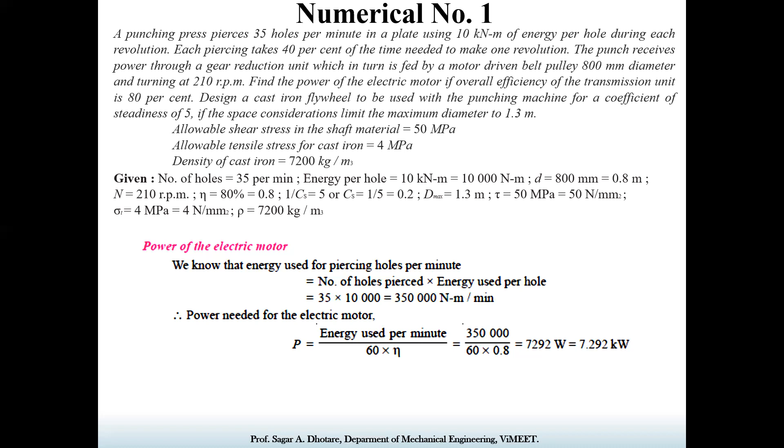So how much power is required? That is 7.292 kilowatt. Now you can select the motor from PSG data book page number 8.125. Now the next one, the design of the cast iron flywheel.

First of all, let us consider the maximum fluctuation of energy. As the overall efficiency of the transmission is 80%, the total energy to be supplied during each revolution is the energy transmitted each revolution, 10 kilonewton meter, divided by 0.8. So the actual energy required is 12.5 kilonewton meter. That much energy is needed.

We should calculate the velocity of the belt to calculate the tension in the pulley. V is equal to pi DN, where the diameter of the pulley is 800 mm and the speed is 210 rpm. So the velocity is 528 meter per minute. The net tension or pull acting on the belt is equal to P into 60 divided by V. The power is 7.29 kilowatt, so it is 7,292 into 60 divided by the velocity, 528. So the net tension is 828.6 Newton.

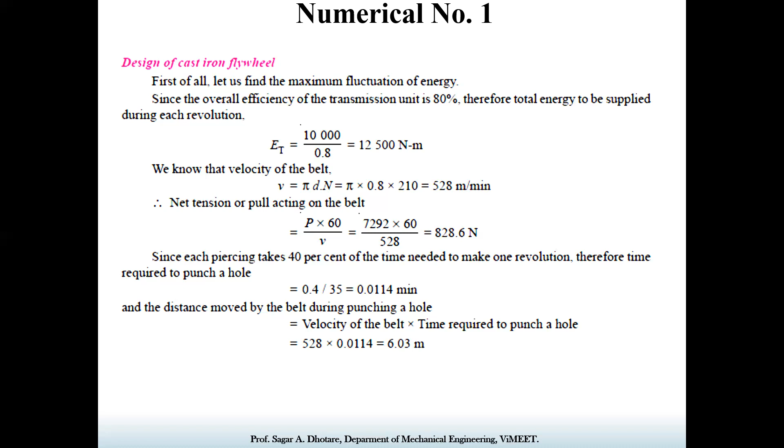As we know, each piercing takes 40% of the time to make one revolution. Therefore, the time required for punching a hole is 0.4 divided by 35, that is 0.0114 minute to punch one hole. The distance moved by the belt during punching a hole is the velocity of the belt into the time, that is 528 multiplied by 0.0114, which is 6.03 meter. This is the distance moved by the belt during the punching of each hole.

Now the energy supplied by the belt during the punching of a hole is EB, net tension into the distance traveled by the belt, that is net tension, which we have calculated, 828.6 multiplied by 6.03. The energy supplied by the belt during the punching of a hole is 4,996 Newton meter.

Thus, the energy to be supplied by the flywheel for punching during each revolution, or you can say maximum fluctuation of energy, is nothing but ET minus EB, that is the energy actually transmitted and the energy actually utilized. So that fluctuation is calculated by ET minus EB, that is 12,500 minus 4,996. The fluctuation of energy we get is 7,504 Newton meter.

Now we need to calculate the mass of the flywheel. Small m is the mass of the flywheel rim. Considering the maximum flywheel diameter is 1.3 meter, from the empirical relation, capital D is equal to 1.2 m, or you can say R is equal to 0.6 m. Now we know the angular velocity omega is equal to 2 pi N by 60, with N equal to 210. So omega is equal to 22 radian per second.

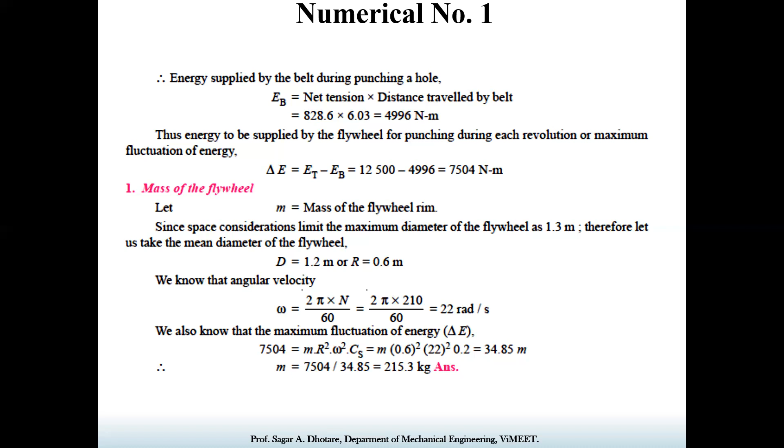Now we know the equation of the mass of the flywheel ring: m is equal to A into pi D into rho. So 215.3 is equal to A into pi D into rho. A is equal to 2T square, D is equal to 1.2 meter, which is the maximum we have considered, and density is given as 7,200. So putting all the values, we get T is equal to 0.065 meter, that is 65 mm. And B is equal to 65 multiplied by 2, that is 130 mm.

Next, calculating the diameter and the length of the hub. Small d is the diameter of the hub, d1 is the diameter of the shaft, and L is the length. The diameter of the shaft we can calculate based on the mean torque transmitted by the shaft, P into 60 divided by 2 pi N. That torque is equal to 331.5 Newton meter.

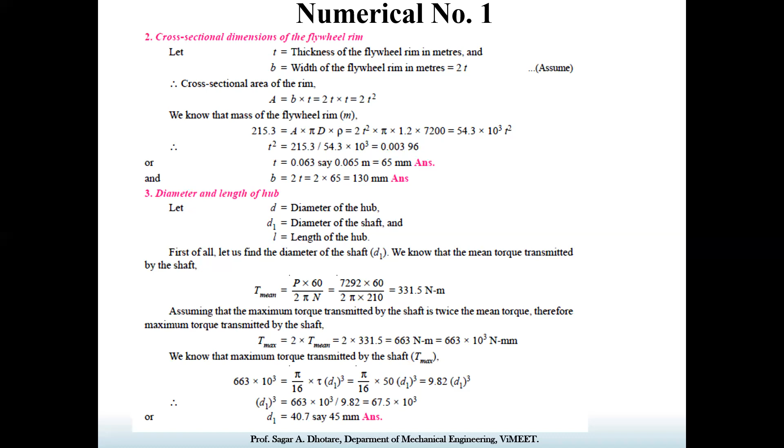Now based on the empirical relation, the hub diameter is 2 times the diameter of the shaft, that is 45 multiplied by 2, 90 mm, and the length L is equal to B, that is 130 mm.

Now cross-section dimensions of the elliptical arms. The material is cast iron, that is elliptical cast iron arms. A1 is the major axis, B1 is the minor axis. B1 is equal to 0.5 times A1, that is the assumption. And we are considering the number of arms equal to 6.

So the maximum bending moment in the arm at the hub end, considering the arm as a cantilever beam, is M equal to T divided by R into n into capital R minus small r.

That is radius of flywheel minus radius of hub. So putting all the values, what we get: 663 divided by 1.2 into 6 into bracket 1.2 minus 0.09. The maximum bending moment M is equal to 102.2 Newton meter. Now the section modulus for the arm, as it is elliptical, so Z is equal to pi

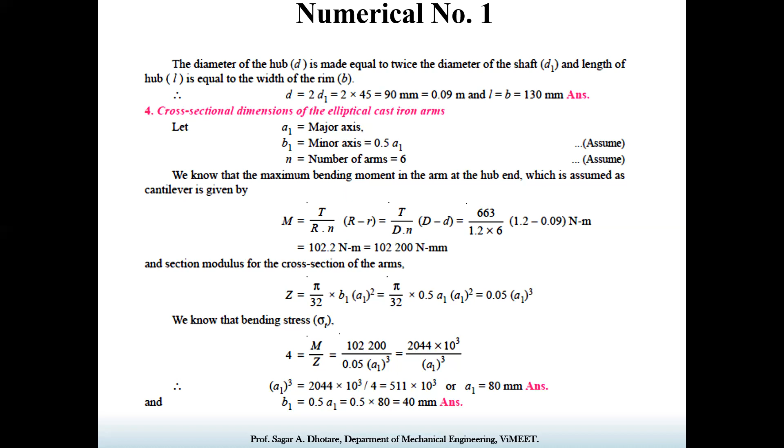So putting the values of M and Z, we get all values in the form of A1. So the major axis for this elliptical arm is equal to 80 mm, and the minor axis of this elliptical arm is half of that, so it's 40 mm.

Now calculation of the dimensions of the keys. Based on the diameter, we select a standard key from PSG, a rectangular sunk key with width W equal to 16 mm and thickness equal to 10 mm. So let's see whether this key will fail or it can sustain the torque. The key will be designed by considering the failure of the key in shearing.

So for shearing, we need the maximum torque of the shaft, that is 663 into 10 raised to 3 Newton mm, which is equal to L W tau into D1 by 2. So putting all the values, we get length L equal to 38 mm. Because we know the width and the thickness of the key, we only need to calculate the length.

Now let us check the total stress in the rim, which should not be greater than 4 megapascal. We know that the velocity of the rim V is equal to pi D N by 60, that is 13.2 meter per second. And the total stress in the rim is sigma equal to sigma V plus sigma T, which we have already simplified: sigma is equal to rho V square into 0.75 plus 4.935 R divided by n square into t, where n is the number of arms.

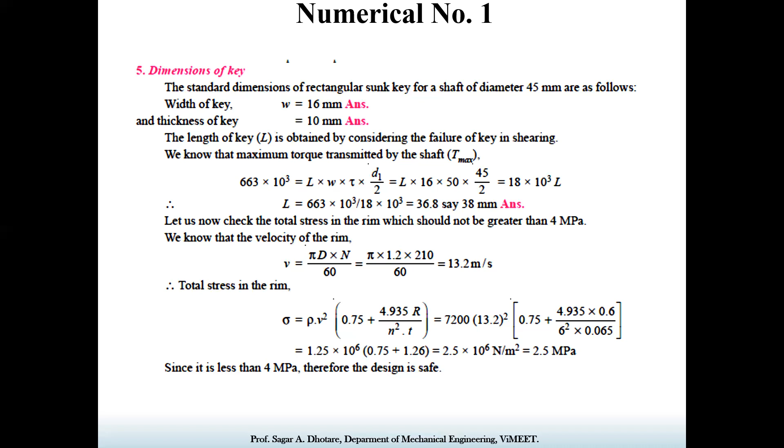Now we will discuss one more example with respect to the four-stroke engine. Design and draw a cast iron flywheel used for a four-stroke IC engine developing 180 kilowatt at 240 rpm. The hoop or centrifugal stress developed in the flywheel is 5.2 megapascal. The total fluctuation of speed is to be limited to 3% of the mean speed. The work done during the power stroke is 1/3 more than the average work done during the whole cycle.

The maximum torque on the shaft is twice the mean torque, and the density of cast iron is 7,220 kg per meter cube. So here a lot of data is given, so you have to read each data carefully. Initially you can draw the turning moment diagram. In figure number 14, I have drawn the turning moment diagram. Also, we have written the given data.

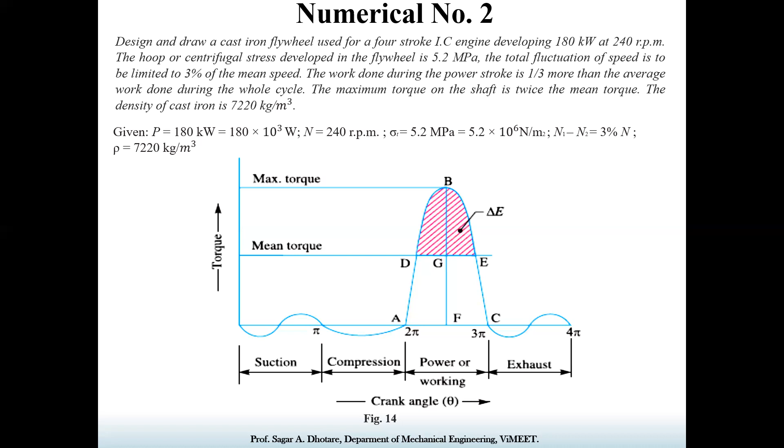Power given is 180 kilowatt. Speed is 240 rpm. Sigma T, that is stress, is 5.2 megapascal. N1 minus N2 is given as 3% of N, and rho is equal to 7,220 kg per meter cube. Now, first of all, let us find the maximum fluctuation of energy based on the turning moment diagram.

We know that the mean torque transmitted by the flywheel, Tm, is equal to P into 60 by 2 pi N, where P is 180 into 10 raised to 3. So the torque calculated is 7,161 Newton meter. And the work done per cycle is nothing but Tm into the angle in radians, theta. To complete one cycle, we have to rotate two revolutions, so that is 4 pi.

Theta is equal to 4 pi. If we are considering a two-stroke engine, then the value of theta is 2 pi. Okay, so putting all the equations together, what we get is the work done per cycle is equal to 90 into 10 raised to 3 Newton meter.

So since the work done during the power stroke is 1/3 more than the average work done during the whole cycle, therefore the work done during the power stroke is equal to work done per cycle plus 1/3 of the average work done during the whole cycle, that is 90 into 10 raised to 3 plus 1/3 of 90 into 10 raised to 3. The work done during the power stroke is 120 into 10 raised to 3 Newton meter.

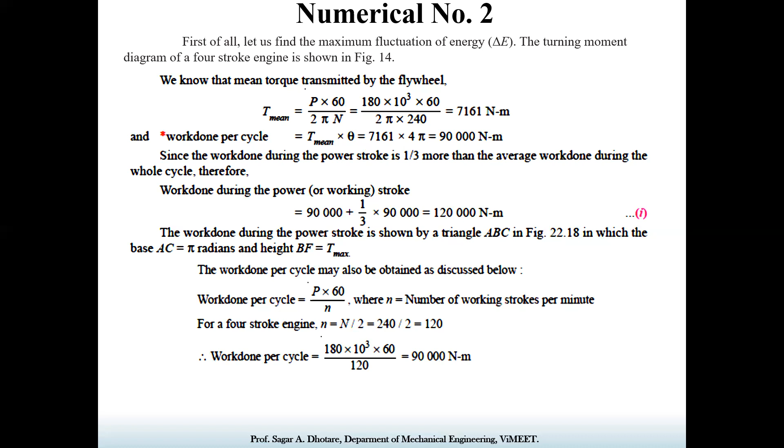Okay, so the work done per cycle is P into 60 divided by n, where n is the number of working strokes per minute, that is capital N divided by 2, that is 240 divided by 2 is 120. So work done per cycle is 90 into 10 raised to 3 Newton meter. So work done during the power stroke is 1/2 pi into T max.

Now compare equations 1 and 2. Based on those two equations, we can calculate the maximum torque. That is 120 into 10 raised to 3 multiplied by 2 divided by pi. So maximum torque is 76.384 into 10 raised to 3 Newton meter.

Now the height above the mean torque, that is BG, is equal to BF minus FG, that is T max minus T mean. We need to calculate the difference because that much is excess power. Okay, so the difference is 69.223 into 10 raised to 3 Newton meter.

So now we need to calculate the maximum fluctuation of energy. Okay, so how can we calculate it? By using the geometrical relation, area of triangle BDE divided by area of triangle ABC is BG square divided by BF square. Okay, so putting the values, the area of triangle ABC is 120 into 10 raised to 3. BG is equal to 69.223 into 10 raised to 3. BF is equal to 76.384 into 10 raised to 3.

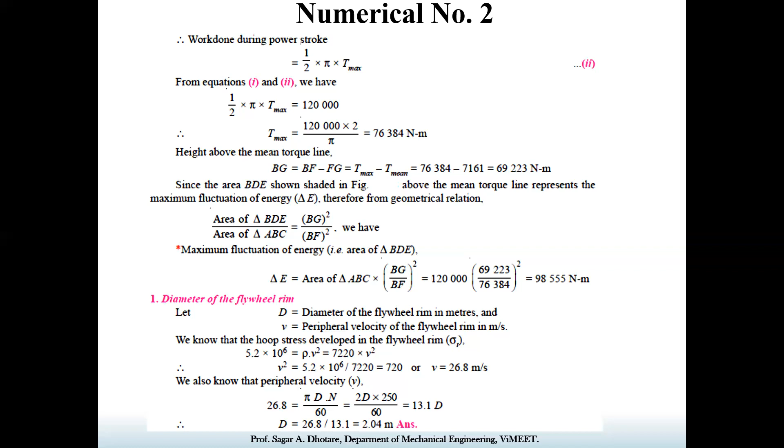Now we know the peripheral velocity, and we also have the speed, so we can easily calculate the diameter. V is equal to pi d n by 60. Putting all the values, we get d is equal to 2.04 meter.

Now calculating the mass of the flywheel rim. We can calculate it by using the equation of maximum fluctuation of energy. So first of all, we need to find the angular speed, then the coefficient of fluctuation, and then we can easily calculate, because we know that the maximum fluctuation is 98.555 into 10 raised to 3 Newton meter. Okay, so the angular speed of the flywheel rim omega is equal to 2 pi n by 60, that is 25.14 radian per second.

Now the coefficient of fluctuation, n1 minus n2 divided by n, is equal to 0.03. Okay, now putting all the values, delta E is equal to m r square omega square Cs. Here, except for the mass, the other values are known, so putting all the values in the equation, we get m is equal to 4995 kg. Okay, so that is the mass.

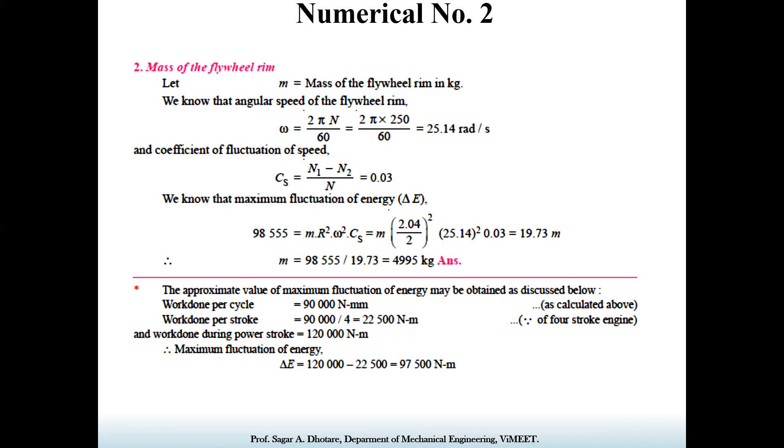Now next one, cross section dimensions of the rim. As we know, b is equal to 2 times t, where t is the depth or thickness of the rim, and b is the width of the rim. Now cross section area: this process is completely similar to numerical number 1. So A is equal to b into t, b is equal to 2t, so A is equal to 2t square. Now the mass of the flywheel m is equal to area into pi D into rho.

So putting all the values of known things, we get thickness equal to 235 mm and b equal to 470 mm. Now next one, to calculate the diameter of hub and shaft. The diameter of the shaft we can calculate based on the maximum torque. Maximum torque is 2 times the mean torque. Mean torque is 7,161 Newton meter multiplied by 2, so 14.322 into 10 raised to 3 Newton meter, that much is the torque.

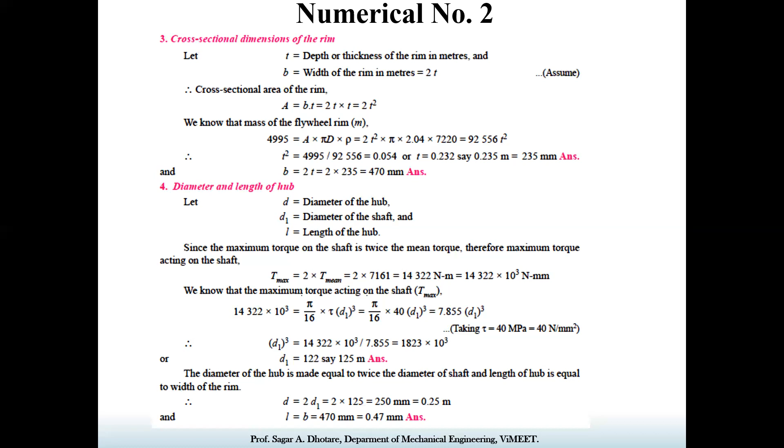So the maximum torque acting on the shaft, T max, is equal to pi by 16 into tau into d1 cube. Putting all the values and calculating the diameter, d1 is equal to 122. But the standard nearest diameter of the shaft is 125, so we are considering d1 equal to 125. Now the diameter of the hub is twice d1, that is 250, and length is equal to b, that is 470 mm.

Now the cross section dimensions for arms: that cross section is elliptical. The major axis and minor axis relations we already know. The number of arms we consider is 6. The bending stress of the material is 15 megapascal, which is given. Now the maximum bending moment in the arm is at the hub end, which is assumed as a cantilever beam. So capital M is equal to T divided by R n into bracket R, the radius of the flywheel, minus radius of the hub. Putting all the values, the maximum bending moment M is equal to 2094.5 Newton meter.

Now section modulus: Z is equal to pi by 32 into B1 into A1 square. That is the equation for elliptical cross section. Putting the empirical relation between B and A, the section modulus equation resolves as 0.05 A1 cube. Now the maximum allowable bending stress is 15, so sigma b is equal to M by Z, M is 2094.5 into 10 raised to 3, divided by Z equal to 0.05 A1 cube. Based on this relation, we find A1 is 140 mm, and B1 is equal to 70 mm.

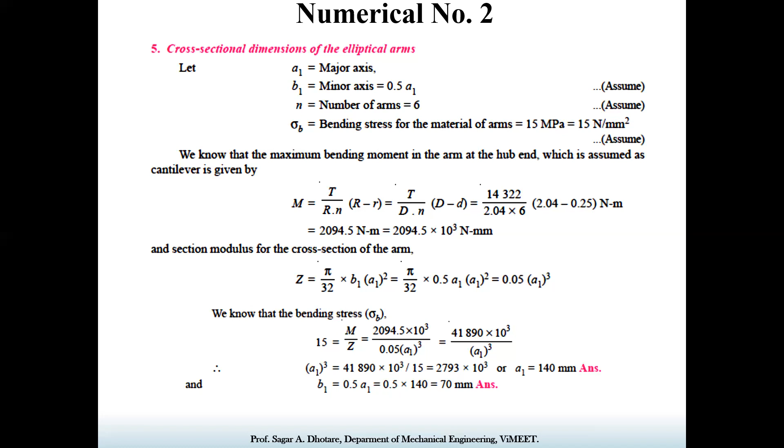Okay, the last point is calculation of the dimensions of the keys. Based on the shaft diameter of 125 mm, from PSG we have selected the rectangular sunk key with width W equal to 36 mm and thickness equal to 20 mm. Now we need to calculate the length by considering failure of the key in shearing. T max is equal to L W tau into d1 divided by 2. Putting the values and calculating, L is equal to 159. Just round up the value to 160, so the length of the key is 160 mm.

Okay, now let's check whether the design can sustain the total stresses. The total stresses induced in the rim should not be greater than 15 megapascal. Total stress in the rim is equal to rho v square into bracket 0.75 plus 4.935 R divided by n square into t. Putting all the values, the total stress induced in the rim is 6.97 megapascal, which is less than 15 megapascal. Hence our design is safe.

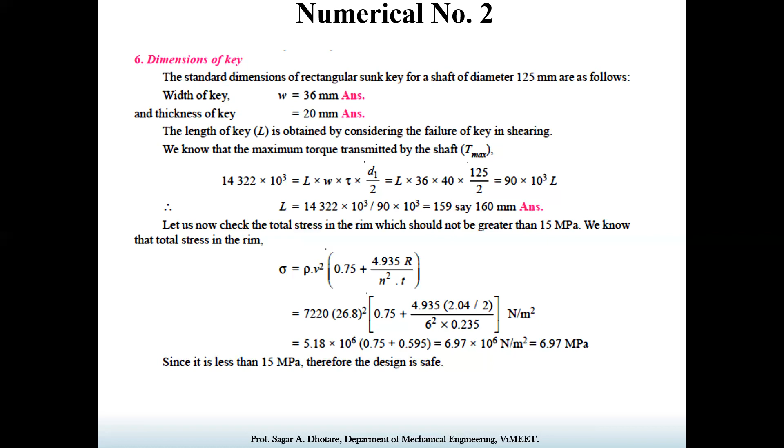Okay, so calculating the dimensions of the flywheel, or design of a flywheel, is very easy. You just need to understand the given data and use appropriate formulas. If you properly observe numerical 1 and numerical 2, most of the process is quite similar. So I hope you have understood the design.